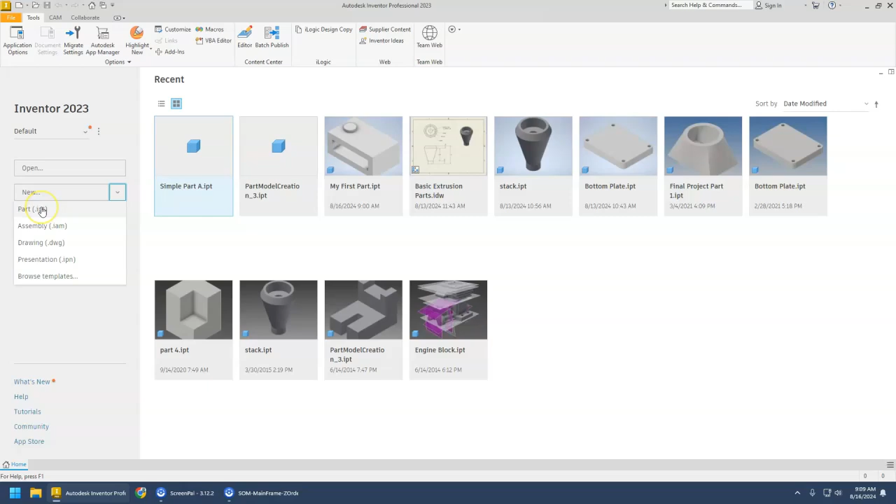All parts begin with a two-dimensional sketch. Select Start 2D Sketch and click a plane to put it on. This is like setting down a sheet of paper to draw on. One part of your first sketch should begin with the yellow dot in the middle. Here I am making a rectangle.

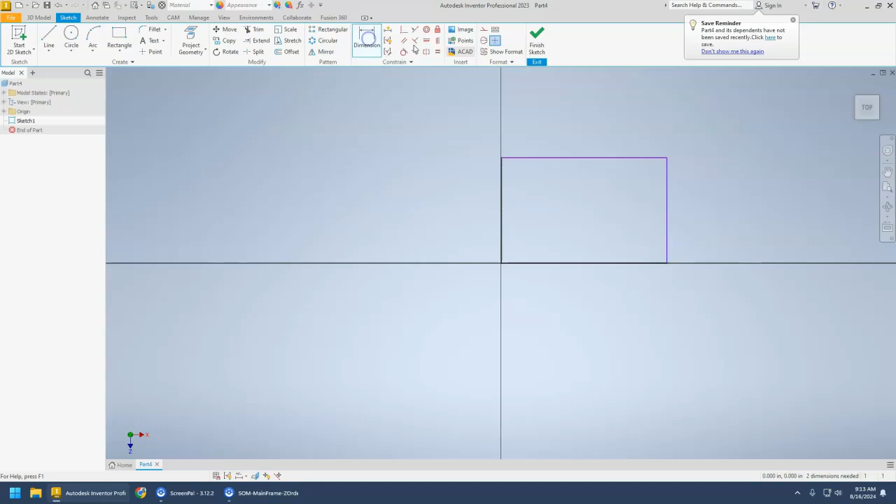I can now use the Dimension tool to make each side a specific size. I'm going to make this one 3 inches tall and 5 inches wide. Once your sketch is dimensioned, click on Finish Sketch. You can use your mouse wheel to zoom in and out.

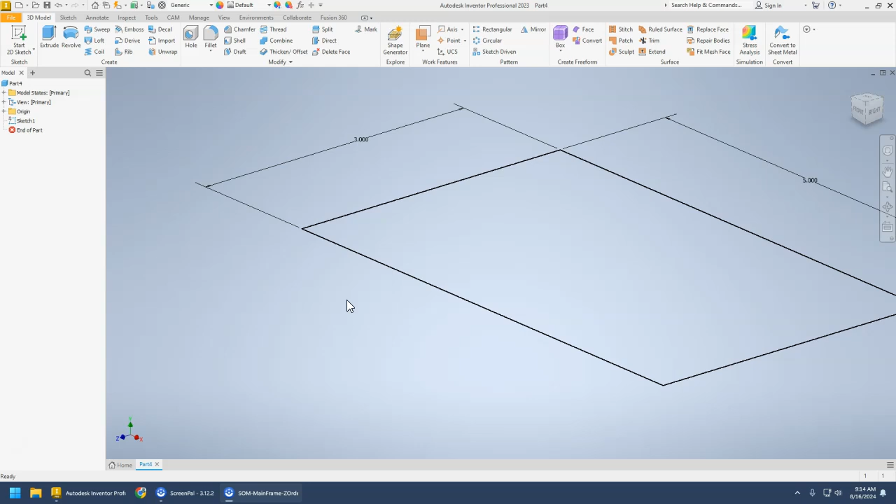To take this two-dimensional sketch and make it into a 3D object, we'll use the Extrude tool. I'm going to extrude this 2 inches tall and click on OK. To fit the entire shape, we can click this corner of the View cube to zoom out and make it fit on the screen.

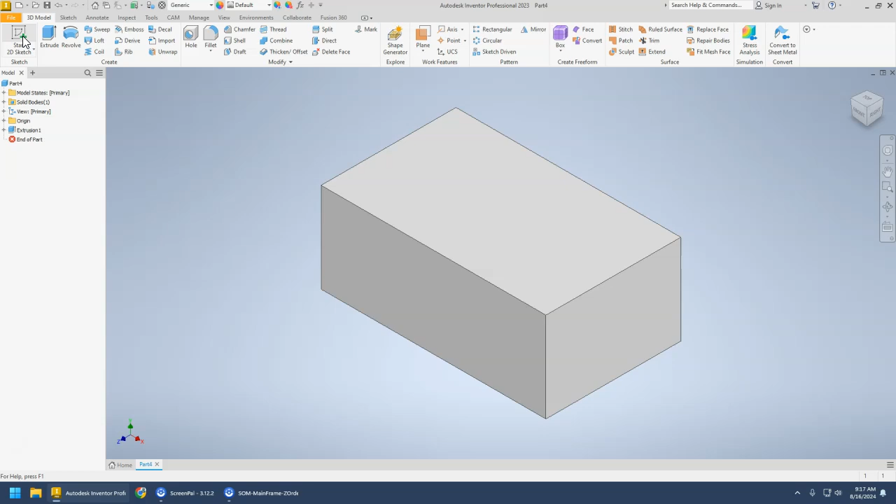Now that we have a 3D shape, we can start putting sketches on the sides of it. I'm going to put a sketch on the top surface by clicking Start 2D Sketch and clicking on the top of the box. Next, I'm going to make a circle in the sketch. I'm going to use the Dimension tool to make it 1 inch in diameter.

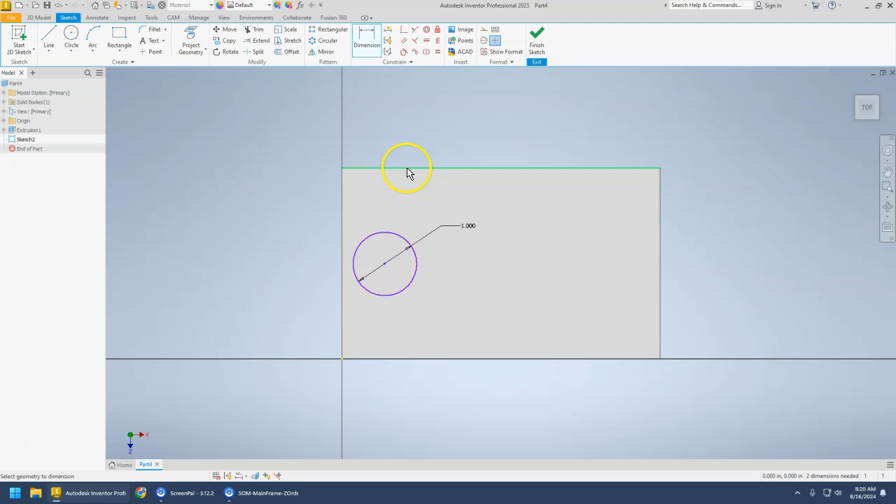Notice that I can also use dimensions to set the location of the circle. In this case, I'm going to set the center of the circle 1 inch from the left side and 1.5 inches from the top. I can then click on Finish Sketch.

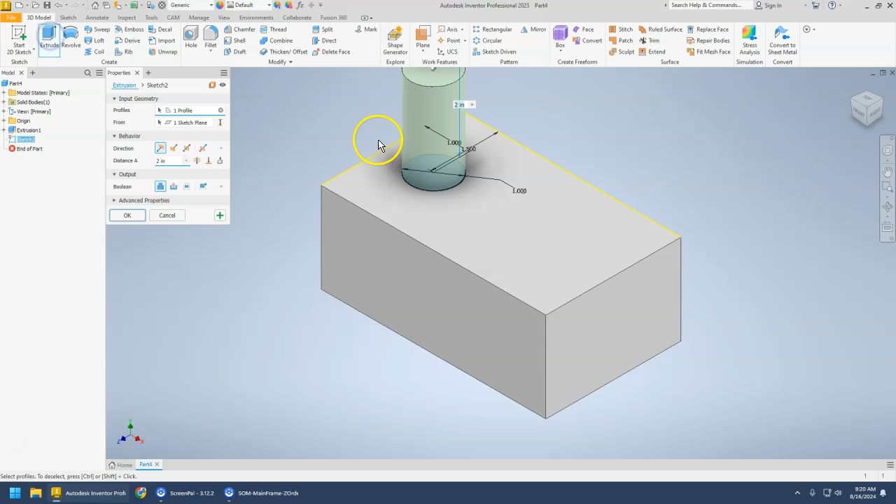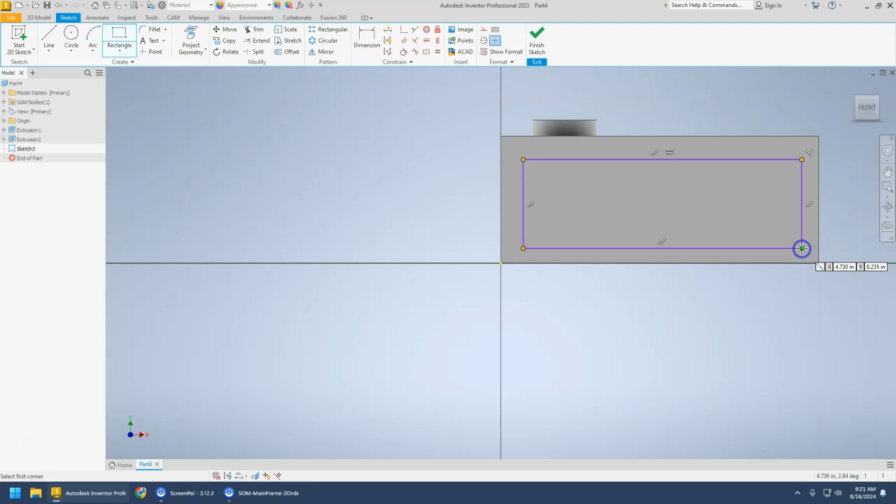I will now extrude the circle 2 inches tall. This adds material to my model. Extrude can also be used to remove material from a model. I'm going to put a sketch on the front of the box. I'm then going to make a rectangle and then use the Dimension tool to offset each edge by 0.5 inches.

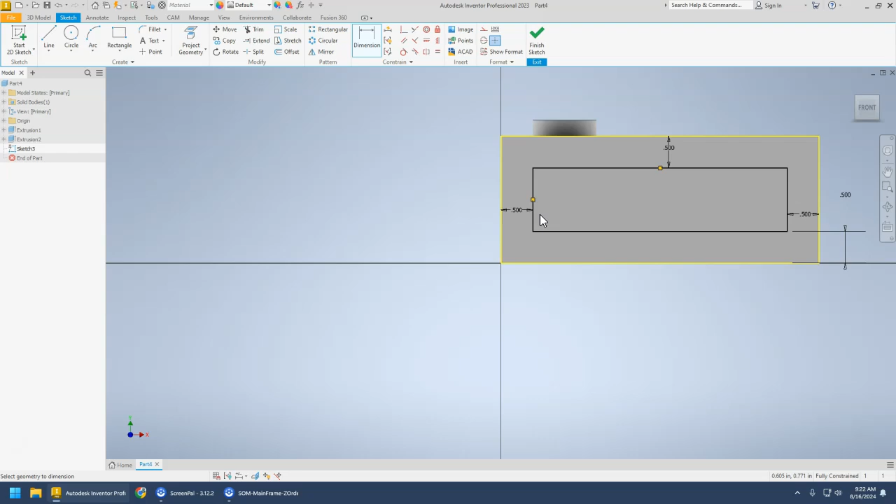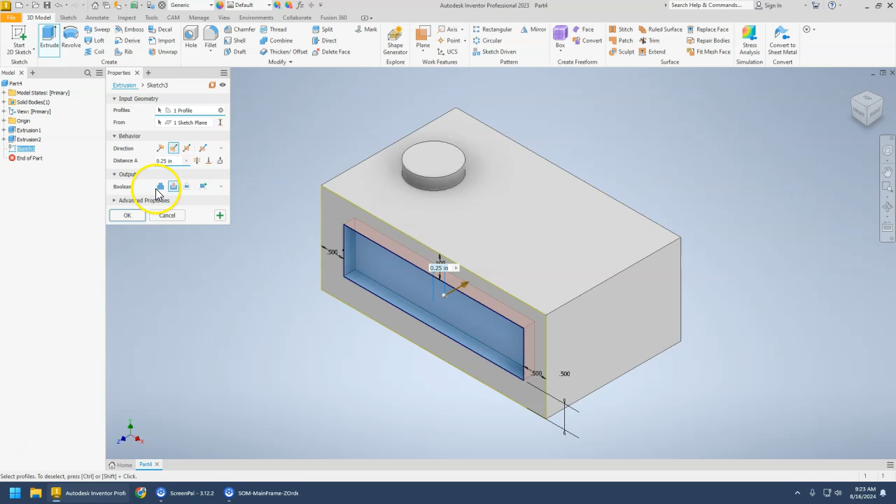I can then click on Finish Sketch. If I click Extrude and then click the inside of the rectangle, it tries to add material. Next to Boolean, I can find the Cut button. As you can see, it is now removing material. I can set a distance such as 0.25 inches, or I can click Through All to go all the way through the model.

When I'm done, I can click on File, Save to save my model. Be sure to give your part a name that helps you remember what it is later.